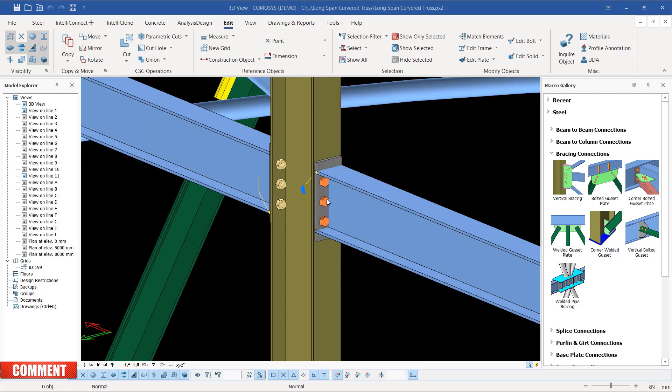Now, if you take a look, we've created all the end plate connections between the tie beams and the columns. What we're going to create now is very simple: the vertical bracings on the gable side. So we have these in place.

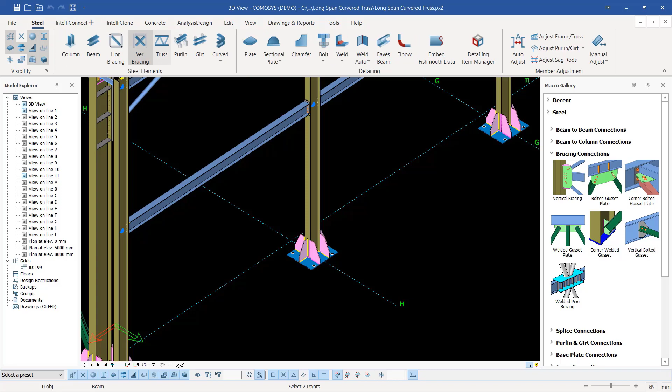We want to go straight to placing the vertical bracings. To access the tool, we come to Steel, then vertical bracings. I'll click on that tool, zoom closer, and snap at the bottom end of this column. Whenever I snap on a red snap point, that means we're at the right intersection. I'll snap on that spot, zoom out, and target the midpoint of this tie beam, then snap on that spot.

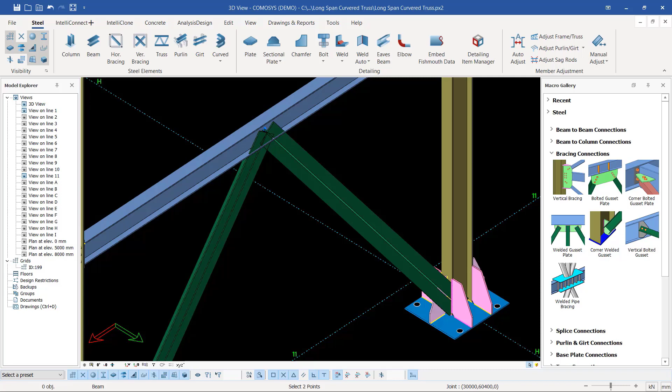Let me come back here and snap on this joint and move all the way to the center of this tie beam, then snap on the same joint here. Then zoom out and target this joint and snap on that spot.

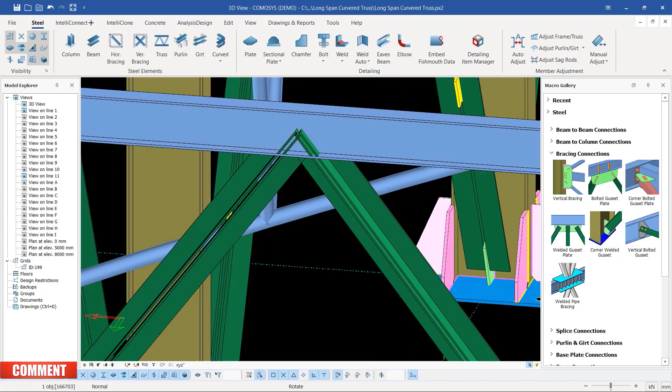If I zoom close, you can see the orientation of these vertical bracings is not in the right direction or position. So I'll show you how we can modify or turn these to the right position.

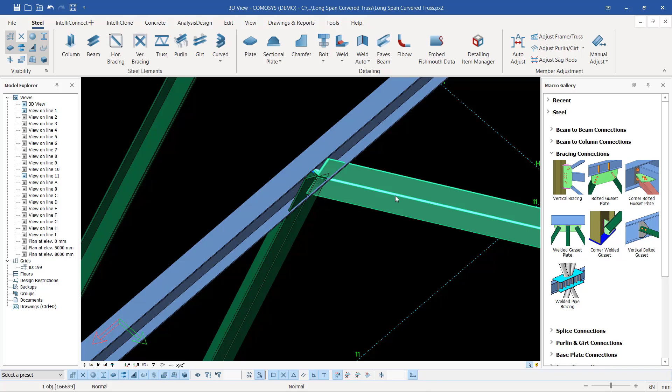You can see our bracings are back to back, twin L-shaped or angle profile. If I select this member and press Ctrl Q, we'll see it turns to the right direction. If I select this member again and press Ctrl Q, we can change the positions to make it correct.

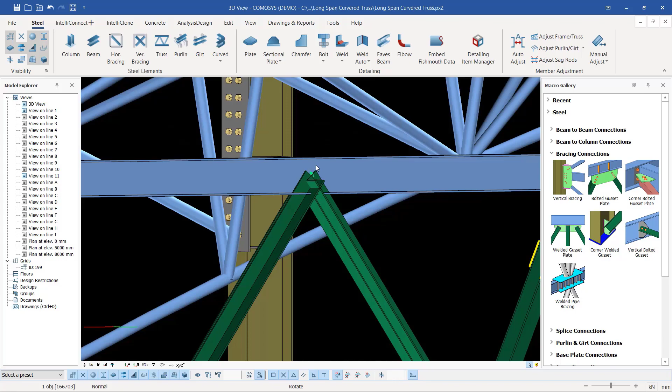That will allow our gusset plates or connection between the tie beam and the bracings to be quite easy. If I select that member and press Ctrl Q, select that and press Ctrl Q, you can see they are now in their best orientation, which makes the connection between this tie beam and the vertical bracing much easier. So next, I want to create the connection, the gusset plate.

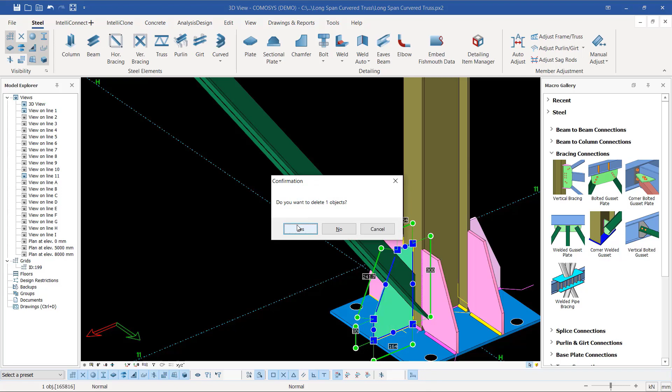At the bottom end here, you can see we have a gusset plate for the column. We can always get rid of that - just select and delete, and come here and select and delete, because it will hinder the connection between this member, the column, and the bracing.

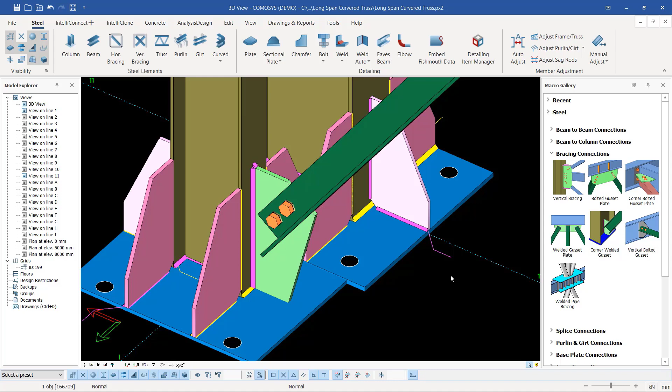So I'm going to apply the bolted gusset plate. I'll select that, select this member, and select that member, then right click, and we can see our gusset plate has been created, but it needs some slight modification. I'll select the gusset plate and press letter M and enter on my keyboard.

This brings up the setting dialog box for this gusset plate connection. It's always advisable that once you create a suitable connection, remember to save. In this case, I have saved connections here, so I'll pick the first one, click load, and click apply.

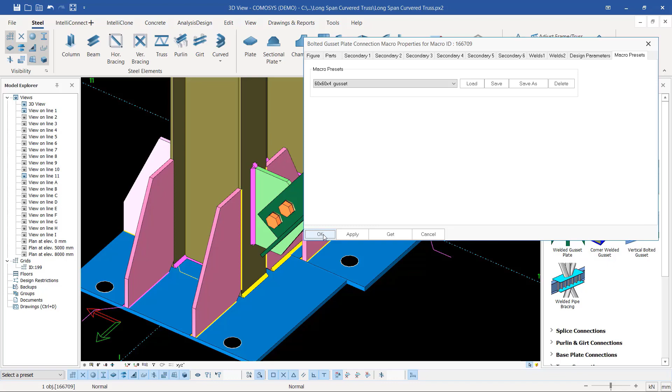So this has been created, you can see the connection in place. I can come here and create a similar connection, and let me try a different one, a different connection.

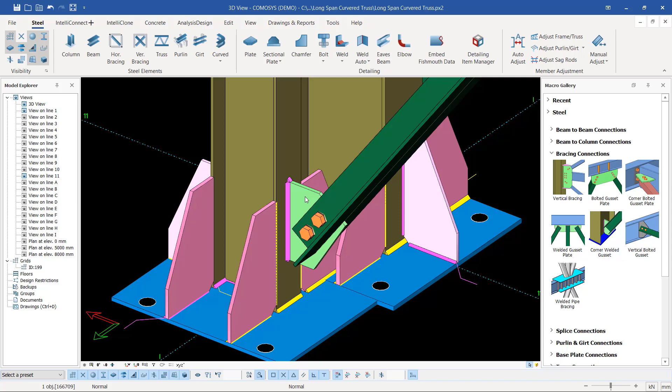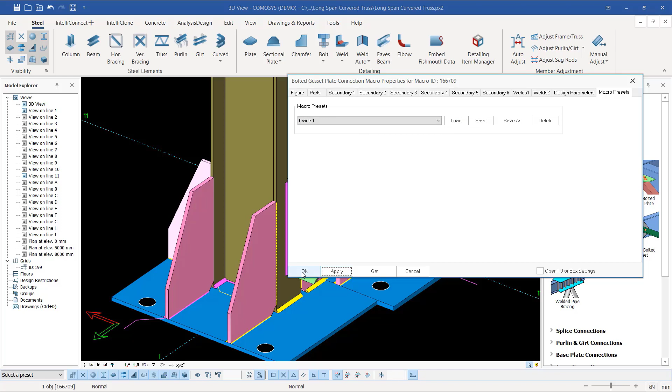If I select this member and type letter M and enter, I'll go back to my preset settings for a connection or gusset plate, and apply a different one. I'll come to macros, pick on that, and pick brace 1, or truss column connection - that's not the best. I'll pick brace 1, load that, then apply, and I can see I have that in place. Connection has been created.

I'm going to apply the same thing here. Select that, right click to effect that connection. I want to modify further because you can see there's some protrusion or extension of this gusset plate beyond the base plate.

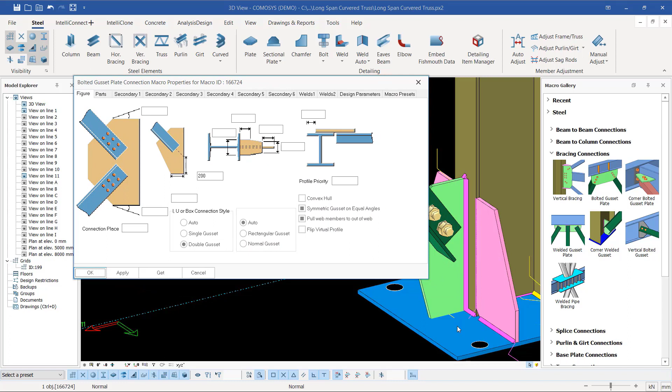So I select part of that connection, press letter M and enter on my keyboard to bring up the setting dialog box for this bolted gusset plate, so I can modify the extended part beyond the base plate. To make that easier, from my preset settings, I'll apply brace 1, click load, click apply, and give it acceptance right there.

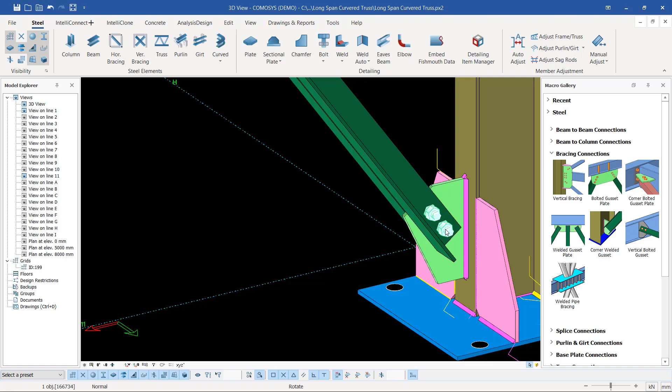If I select my point of interest, then press my right button on my mouse and hold, I'll be able to rotate it like that. So you can see that has been created, the connection has been created.

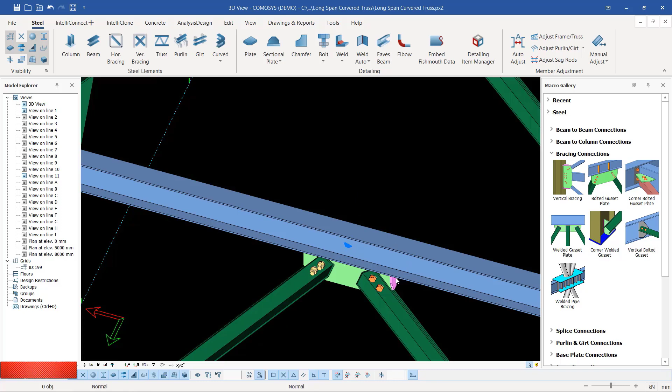So we'll go up here to create another connection between this tie beam and the two vertical braces. I'll use the same tool, select that and select that, right click to create a connection. You can see I have a gusset plate here that I don't want to use.

I select that, any part of this connection, type letter M and enter on my keyboard to bring up that dialog box, so I can customize this connection. I'll come to macro and pick a different one.

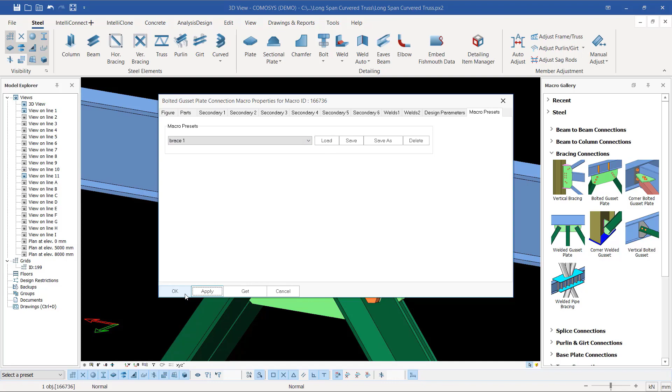So I'll pick a bracing. Let me just select brace 1, click load, click apply, and give it an OK. I'll lose that extended or unwanted gusset plate on this far end. So I'll apply the same thing here. I'll come here, connect that, and connect this. Right click, and I have connection here.

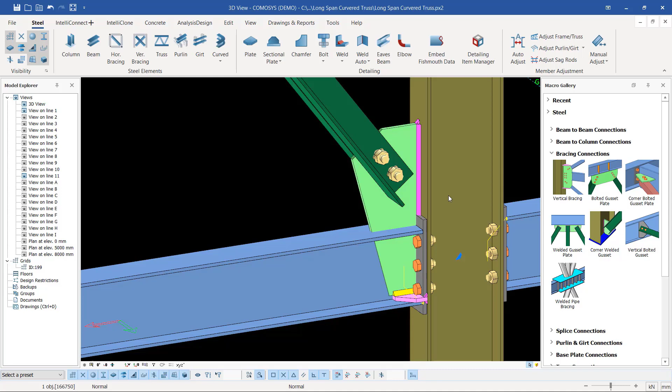So I want to modify this. Select on that, type letter M on your keyboard, and enter to bring up the setting dialog box, and we'll pick the appropriate connection of gusset plate that will not hinder the connection between the tie beam and the column here. So I'll come to macro presets, click on that drop down arrow, and pick 60 by 60 by 4 millimeter thick, then click load, apply, and give it an OK.

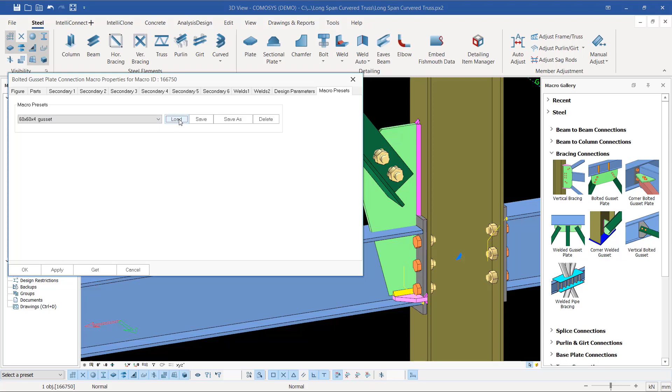You can see there's no hindrance because this will be welded to this column, and this will be carried to the sides, already welded to this plate, this being welded to this plate. So there will be no hindrance between this gusset plate and this. So always take note of that when trying to create these particular connections.

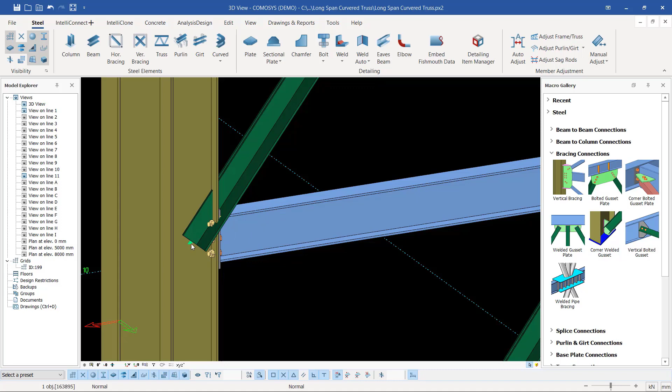So let me pick my point of interest, right click and hold, and turn that to a position where I'll be able to see it clearly. So I'll come back to bolted gusset plate and select on that, select on it, right click, and that has been created.

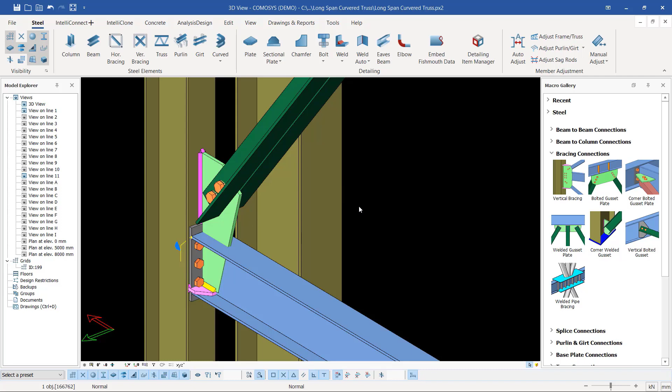So I select any part of that particular connection, type letter M and enter. Once I've pressed enter on my keyboard, I'll get the setting dialog box for this bolted gusset plate connection, and just select the appropriate gusset plate connection. I'll click load, apply, and give it an OK.

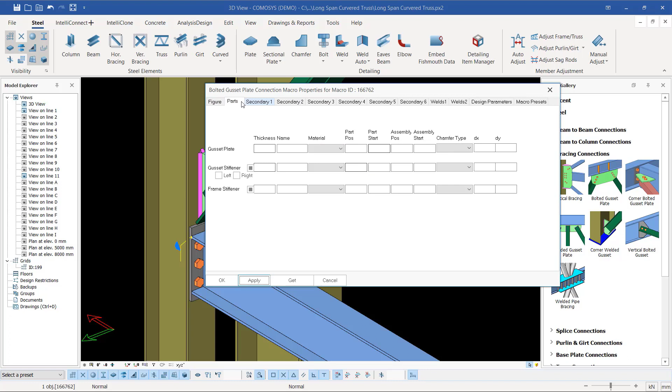Let me just show you the setting here. Once I've loaded this, I'll come to figure, and these are my settings here. If I come to secondary 1, you can see; secondary 2, you can see; secondary 3, you can see. So let me just come to parts. These are my configurations. You can always apply that.

So let me just close that by clicking on OK, and you can see that there is no hindrance whatsoever between the end plate connection here and this gusset plate.

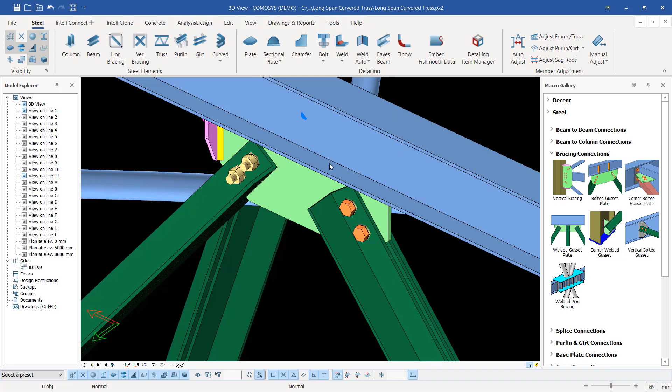So let's apply the same here. I'll come on top, select that, select that, select that, and right click, pick any part of that connection, type letter M and enter, and we can always modify this within the setting dialog box that will come up. If it doesn't appear, just click on empty screen, right click and interrupt, select once again, type letter M and enter.

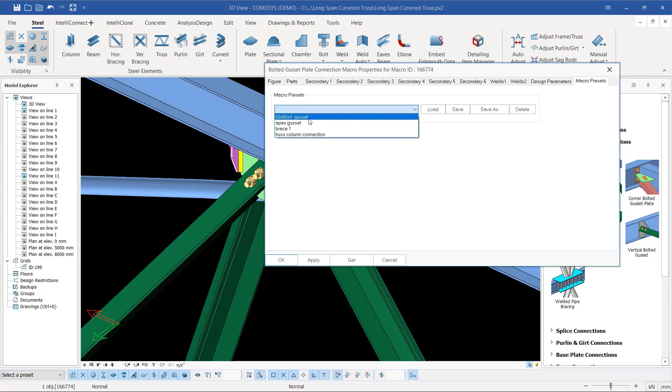So this will bring it up so we can modify our connection. Let's give it some time, and it appears here. I'll come to macro presets and pick the right connection here, load, and give it apply. Okay, so we have our connection in place.

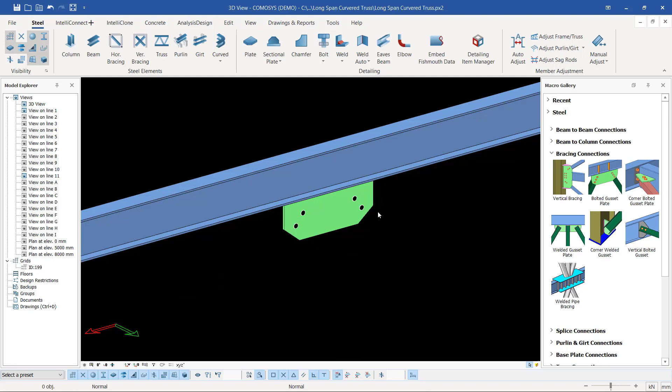You can see that has been welded on top there, and you can counter check whether this is an assembly. If I select this tie beam, right click and come to select an assembly, and show only selected, you can see we only have this as an assembly, that as an assembly, and this will be carried to the side as it is. So we'll be bolted on the other side on the column, and this side on the column, and the bracings will be bolted within this gusset plate. So let me right click and come to show all, and that's how we can do that.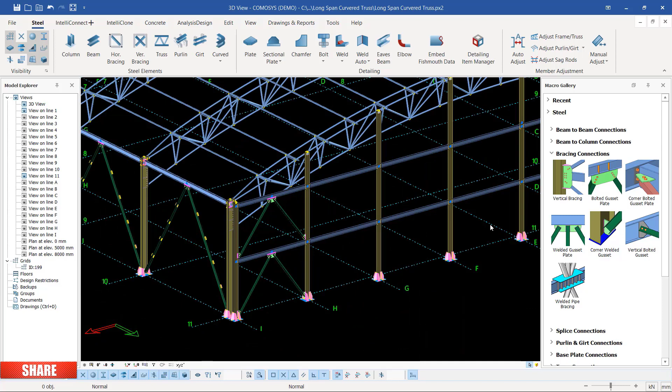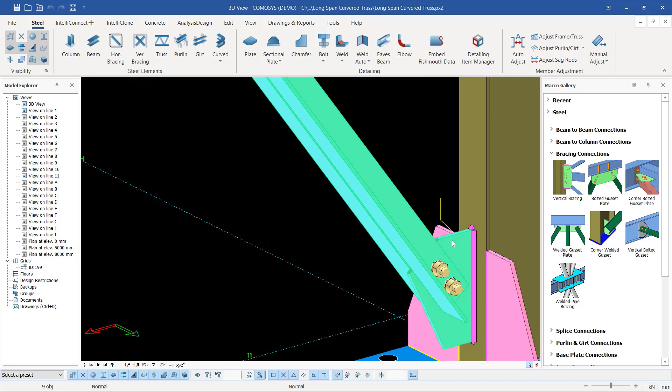So let me populate this along the gable side. First of all, always remember to save your work. So I'll come here and select that, and come here, and let me just turn that round and select that, and select that, select that, and select this, because we want to copy everything along, and select that.

So if I come here, right click and come to copy, and if I pick on this and bring it here, somehow my system might lag, but we'll just give it some time. So if I place it right there, you'll be able to see that has been copied. So let me just place another one there and place another one here.

So any part colliding with any part of our member will have just to be deleted. So let me go on and copy those members along here. Let me just place another one here, mouse over there and place another one right there, and come here and mouse over there and snap another one there, and come here and place another one right here.

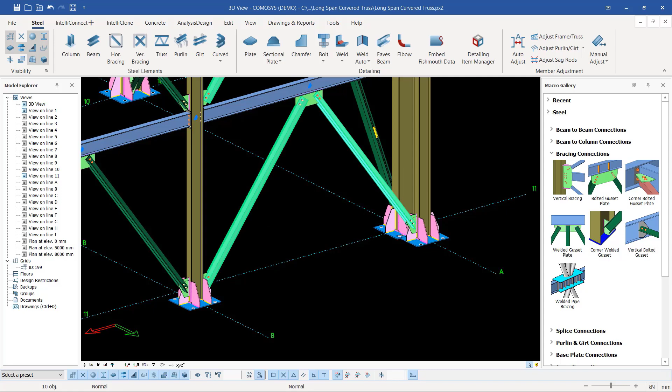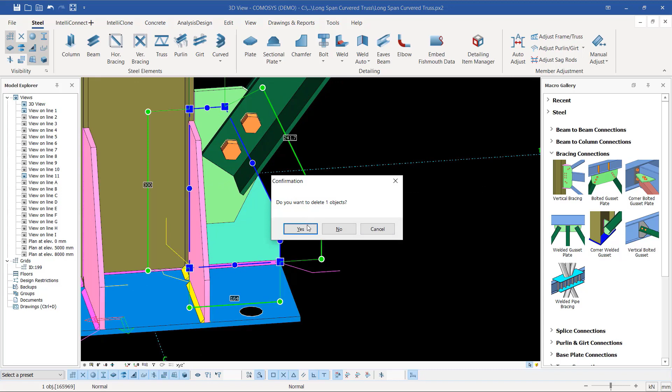Mouse right there, and we've placed our bracings there. So we can always delete any part that will collide with any part of our member. Let me just select on that, turn this, and delete that. Always remember to delete any part that will be hindering the existence or blocking the placement of any member here. So we'll have to delete this. Delete that, delete that, and delete that. So delete any part that will be able to affect this.

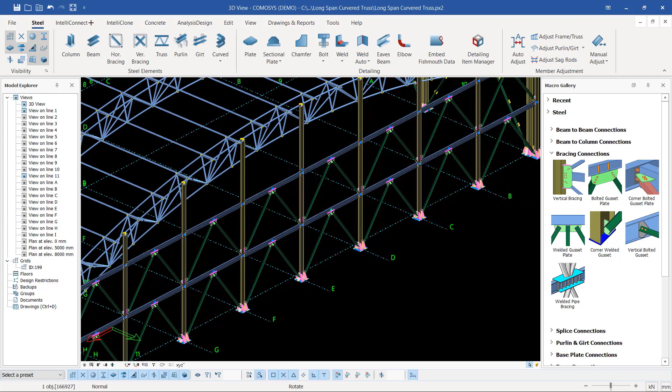So if I select any part of interest here, you can see we have our bracings on this particular end. So the simpler way, we can also always select the gable side and mirror on the other end, so that we have a similar connection on the other end.

So let's meet then on another presentation, where I'll be showing you how we can create the GA drawing, assembly drawing, from this particular structure. So let's meet then.